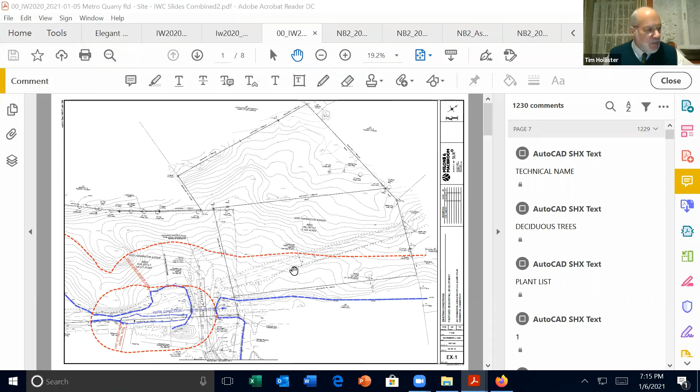What we'd like to do is start off with the existing conditions. As Shannon indicated, this land is essentially to the rear of Farmington Ave. This plan in front of you is what's in your plan set, except we've gone ahead and highlighted some important things for this commission. On this plan, you can see the blue line represents the wetlands.

Embedded in the wetlands on the left-hand side of the plan is a smaller blue line. That's the vernal pool that Megan Raymond has spoken to and will speak to later on. Also for indication, we've shown a 100-foot offset off of the vernal pool for your information. And then the red line is showing your upland review area.

So the subject part is really two parcels. It's accessed off of what we call Quarry Road. If you're coming along Farmington Ave, there's a traffic light that goes into the UConn, I guess, genome facility. You would pull in there and then take a quick left into Quarry Road.

Quarry Road, the first say 50 feet is gravel, and after that it's actually paved all the way up into this site, as you can see on this plan. That was installed as part of an application many years ago. They extended utilities and Quarry Road over the wetlands and over the gas easement line. Underneath Quarry Road, connecting the two wetland areas, are three 24-inch pipes.

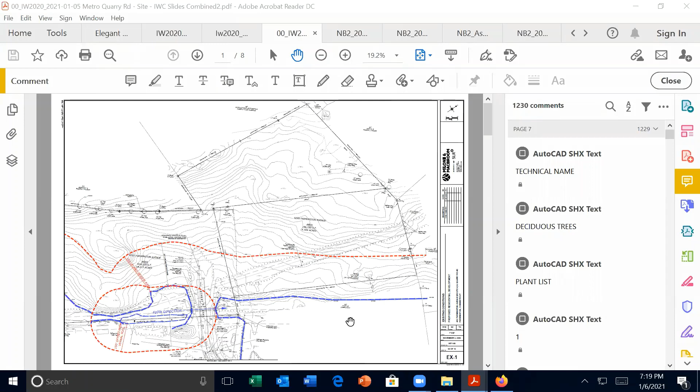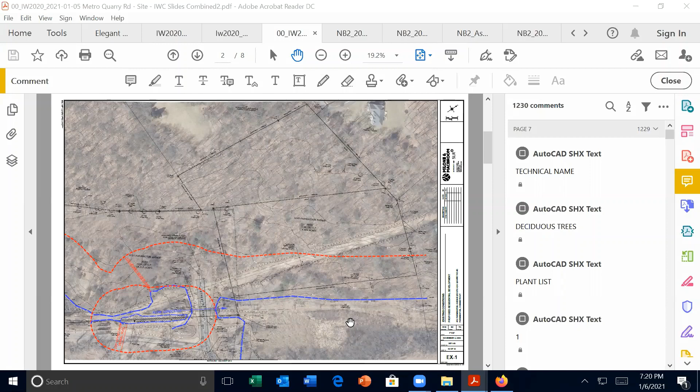Next slide, Shannon. This is the same exact plan we just showed you, but we brought in the aerial photo below it to give you some better perspective. I think the topo survey does a nice job on that. So Shannon, next slide.

So here is the proposal that we have before you this evening. As the record read, it's a single multifamily building with 146 units. We have 221 parking spaces, and of those, 32 are located in detached garages, and 52 are internal to the building, so they have garage doors and are actually under the building itself.

One thing I would note of this plan is garage F has been relocated. That was some comments the commission made at our previous application, that they had interest in moving garage F out of the upland review area. You can see from this plan we've shifted those to the north and met that standard, where we're now out of that area.

As the project goes, the vast majority of it is located out of the upland review area. We actually have only a very small impervious area located in the upland review area - that small parking area there totals about 6,500 square feet. We're also paving the end, where we pick up where Quarry Road ends and goes up the hill, about 4,600 square feet. So a pretty small area considering we're talking about 10 acres of site.

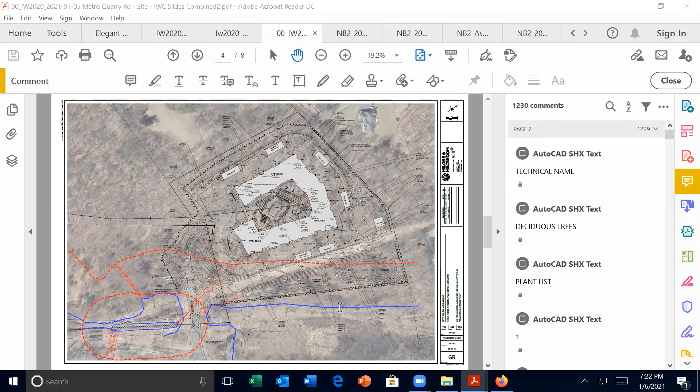An important part of this project is the stormwater system. We're dealing with stormwater in 2 ways. One, there is a very large watershed that flows from west to east towards the wetlands, coming through the property. It's an off-site watershed that we are managing, and because it's essentially coming from off-site sources and not through the project, we did not want to route that through our stormwater water quality chambers and basins. So we've created two drainage systems that pick up that water on the perimeter of our site and route it around our project. All that water coming off the site gets routed around, and ultimately does meet up with the outflow of our detention basin, but then discharges to the wetland.

And then on the north side, by the maintenance building, we have one run where we have a swale at the top of the slope, and that water will get picked up. Once again, it does not get routed through the detention basin - it gets taken right to the wetland. That's an attempt to continue to match watersheds.

For the water that we are picking up on the site, we are routing those to 2 stormwater basins. Both discharge - we had to very critically locate those pipes based upon crossing the gas easement. We do have stormwater chambers, or hydrodynamic separators, located on both of those pipes before they go into the detention basins. In addition, those detention basins are designed for both water quality and quantity. We've analyzed the basins for the 2 through 100-year storm events, showing no net increase in runoff for those storm events. The hydrodynamic separators have been designed for 80% removal, and the bottoms of the basins have provided for water quality retention.

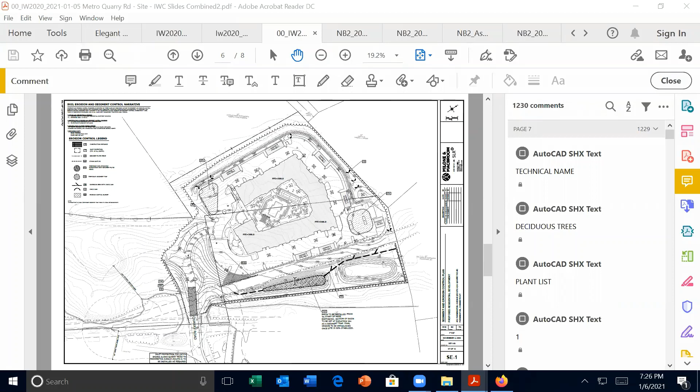As part of this, we have worked with CR3 Landscape Architects to develop a landscaping plan. Megan Raymond was also part of this in terms of selecting plants. I'd like to focus on the area of the gas easement and the detention basins.

We're proposing a native wetland and conservation seed mix in the basins. Along the new clearing limit, which is not at the wetland but at our property line—the wetlands are actually off our property—we've come up with a native planting scheme to buffer that new clearing limit, made up of both native shrubs and trees that will restore that edge. Megan was able to help select appropriate plantings for that.

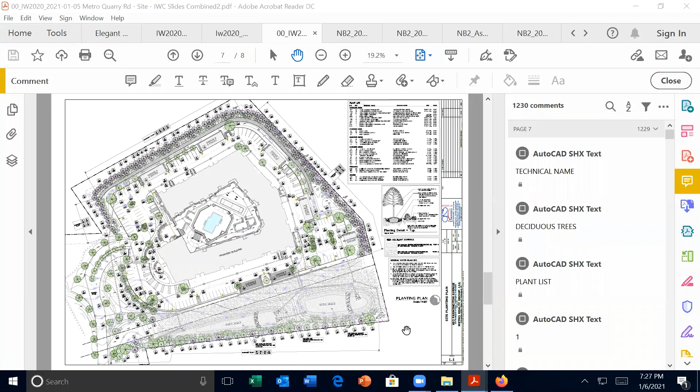As Tim indicated in the introduction of this application, the applicant is now committed to deeding about 4.6 acres of open space.

What you can't see is that on plan left is land already owned by the land trust, so this 4.6 acres will actually be directly abutting their property. That's currently a wooded parcel, and I have a Mylar right here which we'll be delivering to Metro Realty tomorrow for filing on the land records for that dedication of land.

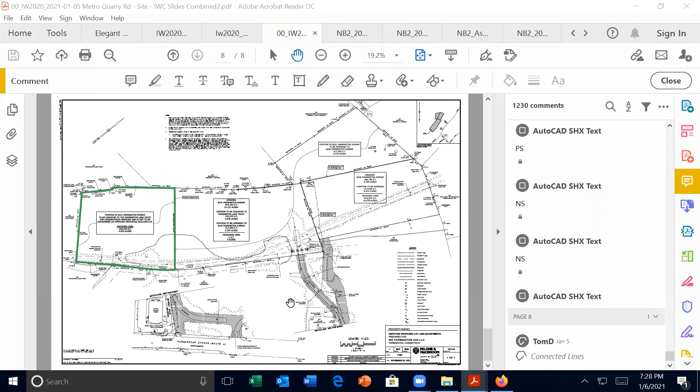Thanks very much, Tom. For the record, my name is Megan Raymond. I'm a professional wetland scientist and registered soil scientist with Milone and MacBroom.

I've been involved with the project since the wetland delineation, which occurred in the spring of 2020. The wetlands on this property were previously delineated in January 2017 by Eric Davison. What I completed this spring was to evaluate his delineated line, verify those boundaries, and augment a portion of the wetland that wasn't delineated north of Quarry Road.

What we're looking at is a wetland complex that runs along the topographic low of these parcels. This system originates in a shrub swamp that exists off-site to the south, and occupies a low gradient flow, when there is flow, in a northerly to northeasterly direction.

This wetland is a palustrine wetland comprised of 3 primary classes—well, the offsite portion is shrub, but on the property itself there are 2 primary wetland classes in existence.

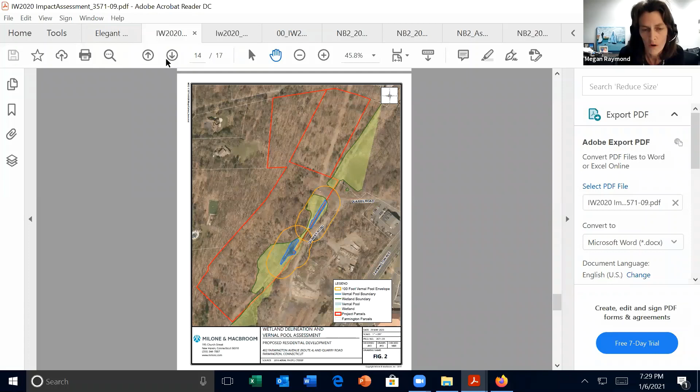One is an emergent wetland, primarily those areas bounded in blue—emergent wetland vegetation surrounding an open water, seasonally open water area. We also have a portion of a red maple swamp that exists just south, in the southern portion of the wetland, where it bows out along the south.

Because this wetland exists along a corridor, in addition to the gas easement there's also an electric and telephone corridor that runs through this area. So there's been quite a bit of disturbance within the wetland boundary itself, which has resulted in the creation of 2 large trough areas, large in relative terms to the overall wetland area.

The acreage of the wetland on these properties is about 1.98 acres, so about 11% of the collective land area between these 2 parcels. Obviously the 4.5 acre piece does not have any wetlands on it, and all the wetlands are confined to the larger 14-and-some-odd acre piece.

These troughs exist within the wetland boundary as excavated features that contain standing water seasonally. Going back to the original wetland delineations, these portions of the site were identified as potential vernal pools. So in the 2020 spring delineation assessment, we also completed a vernal pool assessment to evaluate the composition of these areas as it relates to seasonal breeding for wetland obligate amphibians.

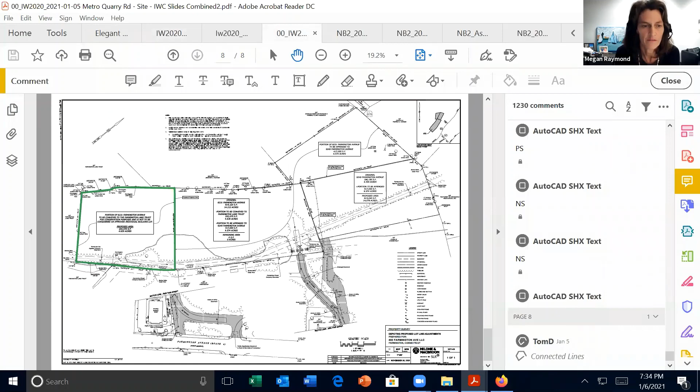When we're looking at this, I think this is a great overview, but I think we can flip to the proposed condition. Yeah, I think that would be a good one to start with here.

When we're laying out this site development, we did pay special attention to the types of wetlands and the wetland functionality present on the property in order to maintain these physical characteristics of the wetland systems.

In looking at the landscape position of the special wetland features, which would be considered vernal pool or wood frog breeding areas, in concert with the overall site layout, we feel confident that the site as proposed will not impair or impede any further productivity of this site as it relates to wetland obligate amphibian breeding.

The work that's proposed is located a good distance to the north of the wetland features, and primarily what we're looking at is protecting the adjacent wetlands through management of long-term considerations through stormwater management and short-term considerations with sedimentation and erosion control.

The sediment erosion control basins are going to be located east of the gas easement, and though this area will be initially disturbed, with the creation of the basins it will be revegetated, and the natural buffer will be reestablished between those two areas.

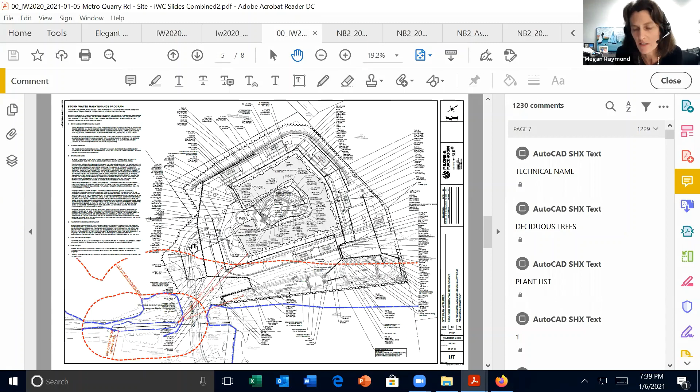I'm happy to answer any questions that you may have at this time, but I'd like to turn it back to Attorney Hollister, unless Tom, would you like to add anything?

The only comment I would say is we, at the previous application, had a list of comments from the town engineering staff. You had it in your packet. I will say that the comments tend to be both planning and zoning and wetland related, but I am confident to tell this commission that we received an updated list from Bruce Sear. As I read through the comments, I do not see any comments that are wetland related, or drainage related.

Just one little question about dimensioning the size of a straw wattle and showing where our dewatering is. But otherwise, I can report to the commission that in fact we've addressed any drainage or erosion control or wetland related comments. And I think if you look through Bruce's most current plan, they're all planning and zoning related, but we did work hard before the holidays to get to Bruce, and I appreciate that Bruce found a time over the holidays to review those, but that would be the only thing I would add.

Megan, thank you. Mr. Chairman and Commissioners, there is also a memo from Ms. Rutherford dated December 31st, which goes through the upland review activities, and it pointedly says there is no direct wetland impact. So that is, Mr. Chairman, that is our presentation. If you want to move on to commission questions, we're happy to do that.

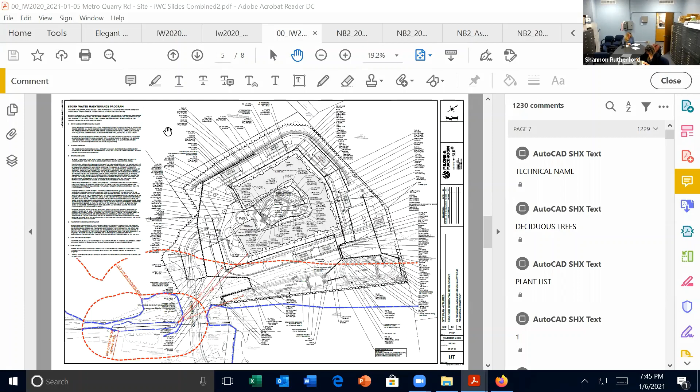Thank you. Okay, Dave? Just one quick question. It was good to see that they added some treatment for those catch basins out on Quarry Road. It's a sediment chamber as opposed to a hydrodynamic separator. I was just curious as to the differences there, but I do realize there's only 3 catch basins involved in it, as opposed to the many from the parking lots. Hopefully a regular sediment chamber would be sufficient for that, but I'd just like to hear a little bit more about that.

Tom Daly for the record, again, exactly what you were saying. It's only taking 3 catch basins, so we thought at that point it was appropriate to come with a sediment chamber. It's a baffled structure, catch basin located over the first part. It's actually a structure used regularly in the town of Glastonbury - they call it the Glastonbury sediment chamber. I think it works well here, and it'll also allow pretty easy access. But it really had to do with exactly what you're talking about - it's only picking up 3 catch basins and a very small portion of roadway. So that's why we chose to go with that at that location.

Thank you. Is that it, Dave? Yep. Okay, Emily? I have nothing at this time. Thank you. Okay, Rich? I have no questions at this time.

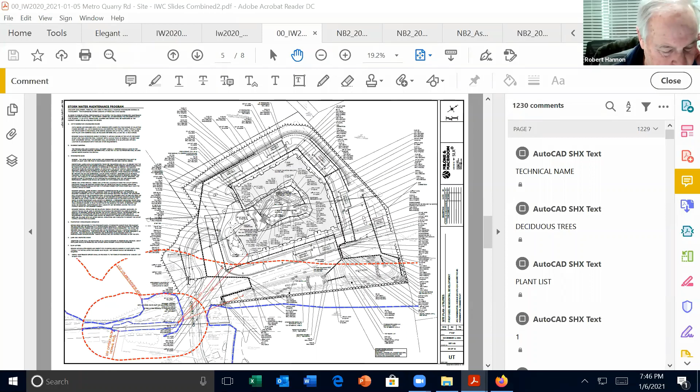I've got a couple, just for clarification purposes. I think you said there's 3 existing 24-inch concrete pipes. That's correct. Located - I'm trying to get the right angle - is it a little bit to the west of where the vernal pool is? Let's see, Shannon's going to try to zoom us in, but just slightly west. Correct. Now is that part of the roadway gravel, or is it paved? That's paved. Paved, and all the utilities are already stubbed on the other side. So except for putting a finished course of pavement and curbing down, it's our belief that road's ready to go.

Okay, so you don't need to do any work on the pipes, like redoing the road or anything like that? No. So that's all set and ready to go? Correct. And even the 3 catch basins we talked about, we are not tying into those pipes - we're going away. So those pipes will not be modified at all as part of this application. Okay, and I just wanted to double check, because again, if you start playing around with the pipes, because that's where part of the gravel road is, I just wanted to make sure nothing was going on there.

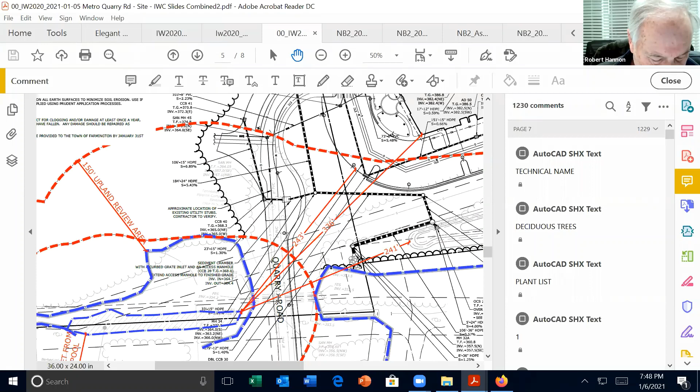In terms of the basins that are being proposed, it looks like you've got some forebays that are there. Correct. Will there be standing water in there?

Only the intent is for the basins to drain over time. What's your definition of time? It depends on the storm, and it depends on the time of year. We have put in the bottom of the basins...

What you can see is these little gravel strips located just beyond the forebay. We put those in to promote infiltration so it drains quicker into the soil. I would hope you're draining something between 24 and 72 hours after a storm, but it depends on the storm and the saturation time of year.

The reason I'm raising the question is because I can see that as a possible safety issue if you've got kids living in this area. So is anything being done to make the basins child-proof, if you will?

Interesting question. We have not come up with that on many projects before. The good thing is it's on the other side of the gas easement. And there's a retaining wall along the entire parking lot there and behind garages E and F, almost right to the end. That retaining wall will actually have a fence and a guide rail in front of it.

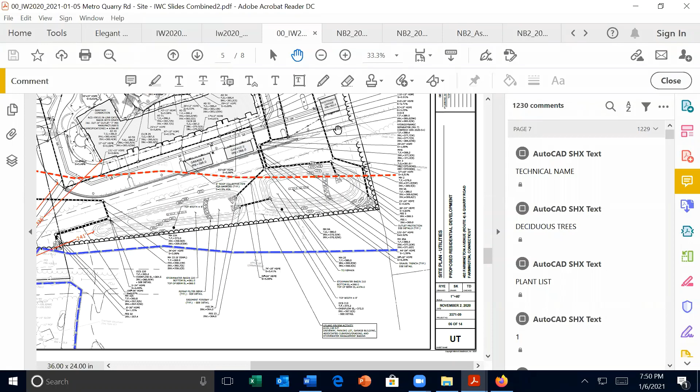Potentially we could extend that ornamental fence just a little bit farther so it runs into it—essentially then you'd have to jump a fence to get over there, cross the gas easement and into there. So that's something we could consider. I think that would be advisable, just from a safety perspective.

So we would just extend that ornamental fence from the end of the retaining wall to the tree line to kind of tuck it up. Yeah, I don't see an issue with that.

Okay, and then just out of curiosity, I know you've got the 100-foot envelope around the vernal pool. Have you done any calculations as to what the disturbed area is around a 750-foot envelope around the vernal pool?

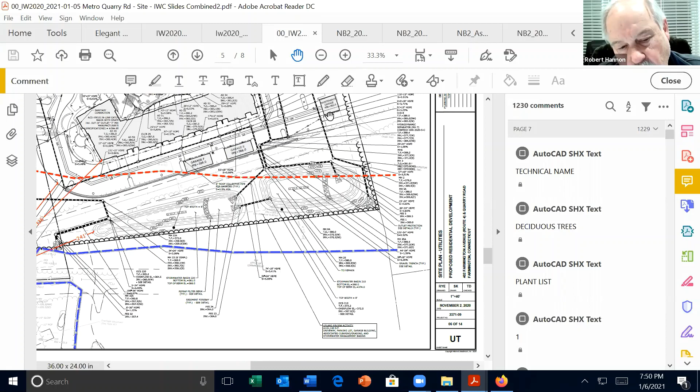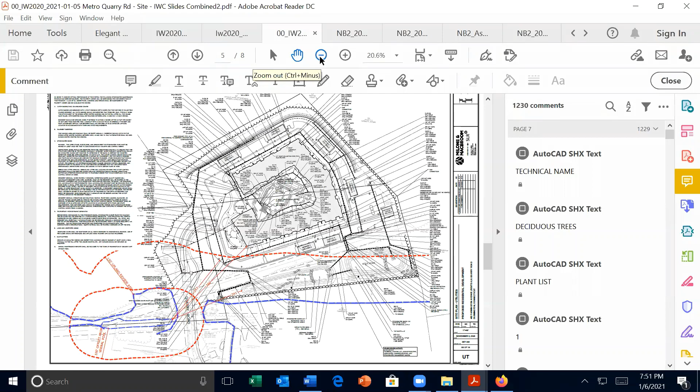Yes, we have looked at that, the overall picture. If you look at these systems and put the 750-foot critical terrestrial zone around them, and subtract out the existing area of disturbance, which is significant along Farmington Avenue, we're looking at an existing critical terrestrial habitat disturbance of approximately a little over 20 acres within a 60-acre zone, and we're adding a little less than 7 acres to that. So the existing disturbance is 37%, and we're adding another 11%. The overall critical terrestrial habitat that remains is greater than 50% with the proposed project.

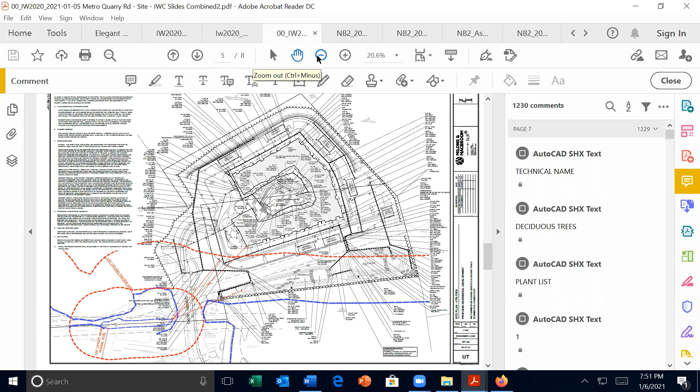Okay. I'm sorry, it's been a long time since I've been on Quarry Road—is this where the old landfill is? It would be left on this plan, off this plan.

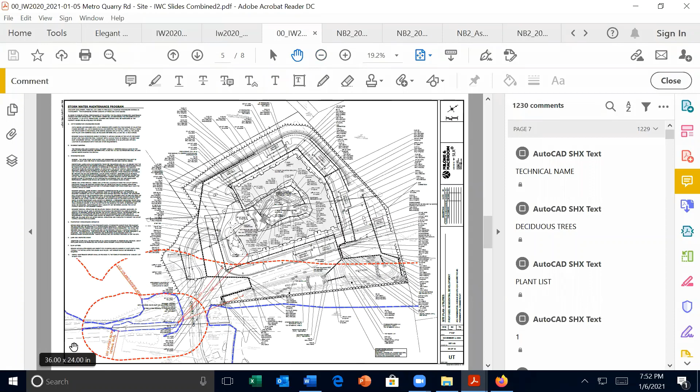So yeah, there we go, Shannon, over there and a little bit farther down off the map. Correct. Were you on the site walk with us that day? No, I was not—I had knee replacement surgery. Oh, I'm sorry to hear that.

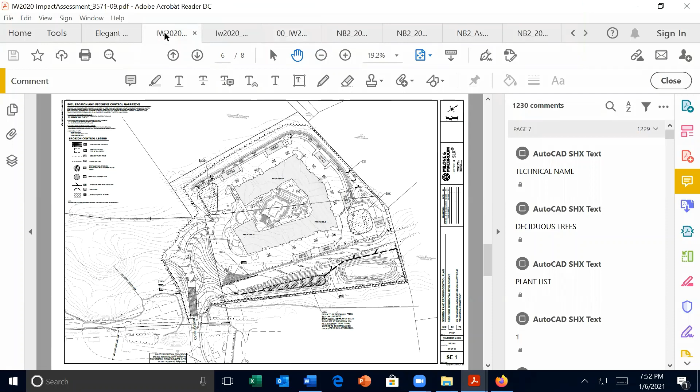So yeah, that exists, and there's a public works facility there with a lot of material storage present now. So that whole zone extends to the southeast. Right, exactly, there you go. That's great.

No, I just wanted to double check because I wasn't sure which side of the line the landfill was on, that's why I'm asking. Right, so what we're looking at is, because we have this topographic low in a confined area with a nice scrub shrub wetland existing offsite to the southeast, we're looking at this southern directional buffer in this location. Okay, thank you.

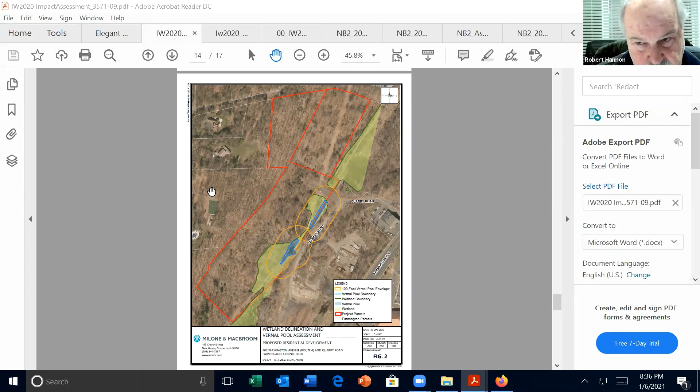And we have other public comment. So at this point in time, do we want to open it up to the public? And you've got control of that because I'm not sure who from the public is here.

I think I want to try to do something here. This is always a unique experience when you're dealing with the computer instead of in person. No, it is, and everybody's been very patient.

Mr. Fitchman's hand is up. I was going to— I think Mr. Hollister's hand is up too.

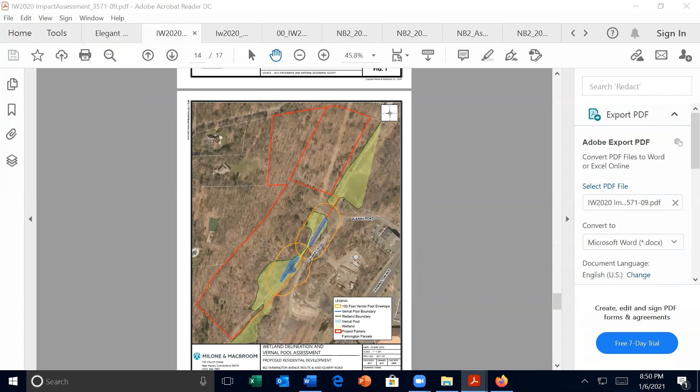Does anyone else from the public have any questions, comments, or anything they want to share with the applicant or the commission, either in favor or in opposition? Any questions regarding this matter? Mr. Chairman, I'm not seeing any additional hands raised. So again, if you have a question, use the Zoom function to raise your hand electronically, and you will be addressed just as your peers have this evening. Mr. Chairman, I'm not seeing anything else, any further questions.

Okay, if that's the case, I think where we're at with this is continuing it to February 3rd, correct? 7 o'clock. Correct. We're looking at having the materials come in from Mr. Logan on or before the 22nd of January, and looking for Dr. Clemens' comments on or before January 22nd. There were a couple of comments raised by the public that the applicant may also want to research and provide some answers to at that point in time.

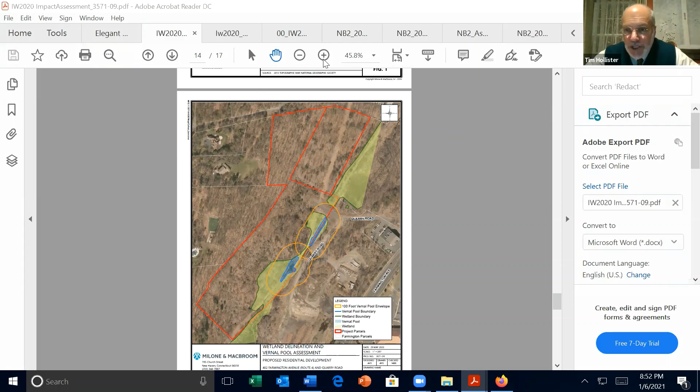Attorney Hollister: Mr. Chairman and members, I just want to put on the record that we will provide the additional information that was requested by Dr. Clements and Mr. Logan. We'll provide that to them hopefully within a couple of days, so they have ample time to look at it and work it into their reports. We will try to file our own responses to other public questions also on the 22nd of January. And for anyone else who is retaining an expert, you can contact my office or Mr. Richards, and if you want information, we will get it to you as quickly as we can. Shannon will keep you in the loop so you know what questions we have, or what requests for information we have received and responded to. Thank you. Certainly, thank you.

Do we need a motion to continue it to the 3rd? Yes, please. Would somebody care to make a motion to continue the public hearing until the 3rd of February, starting at 7 o'clock? Move to continue. Robert Hannon with the motion, and we need a second. Dave will second. Okay, those in favor? Aye. Opposed? Abstaining? So be it, we continue it to the 3rd. And Mr. Chairman, Jay Tulin posted aye in the chat. Thank you, Jay. Thank you, Robert.

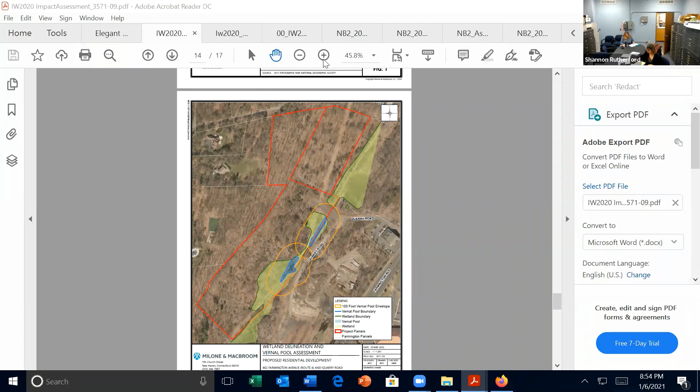Going to new business. My understanding is Jake Clark will not be here tonight, so we need to table this until the next meeting. Correct.

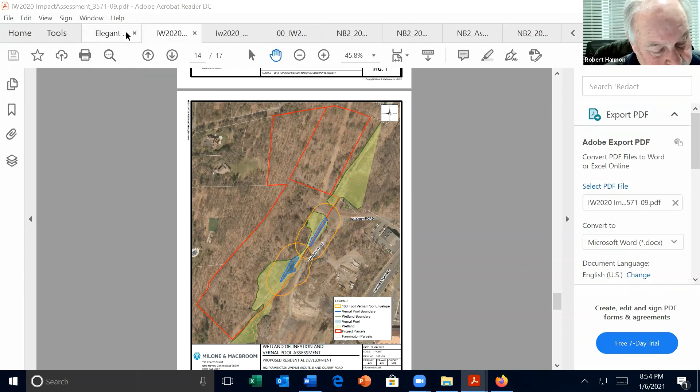Okay, so continuing in a long line of recent events, the show cause hearing at 16 Clearbrook. Yep, just give me one second and I'll get the documents here. And I think the property owner and Ian Cole are on. So, yeah. Ian, are you taking the lead with this?

Sure. Good evening. For the record, Ian Cole, professional soil scientist, professional wetland scientist. I'm here tonight with Mr. Riviera. I was retained by Mr. Riviera to assist in resolving the recent cease and desist order. This order involved the removal of vegetation within the 100-foot upland review area.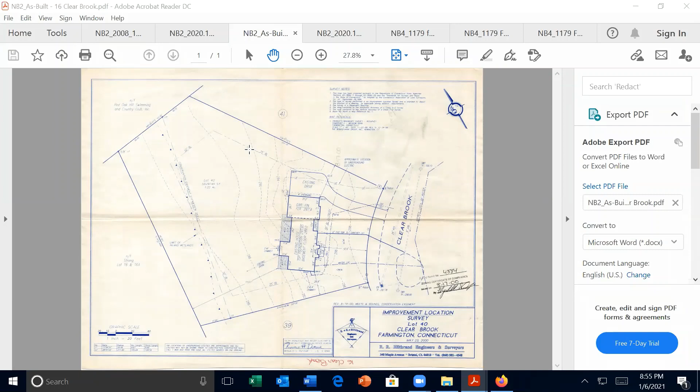Last week, I had an opportunity to visit the site and do a quick assessment with Mr. Riviera present to go over the limits of the recent vegetation removal. I wanted to get out there pretty quickly to take advantage of the ground while it was free of snow, just in case we got a big snowstorm, so I could see what went on there. My initial thoughts are that the area was stabilized and no immediate actions were needed. The backyard is flat, and the ground still has cover to it, so there's no instance of exposed or bare soil creating a risk to the wetlands. And while on site, I think it's also noteworthy, Mr.

Riviera had the easement surveyed and very well marked out and delineated prior to this work. So it's very easy to see and demonstrate that there was no encroachment into the conservation easement or the wetland boundary, and I think that is notable.

The intent here is to work with the applicant to put together a more comprehensive wetland application. The intent was to gain more lawn and start a feasibility study for some backyard improvements to maybe include a playscape and a pool. So with that being the intent, and given the time of year, we were looking to come back to the commission with a complete application, and during that process, some restoration activities would be accounted for in that wetland application for the overall property improvements.

I guess I would defer. I'd be happy to answer any questions from the commission at this time, but otherwise, for additional background, Mr. Riviera can provide that if the commission has any questions. I didn't know, because I can see that he's on the phone, so I don't know if Mr. Rivera wanted to speak before we handed it over back to the commission for questions.

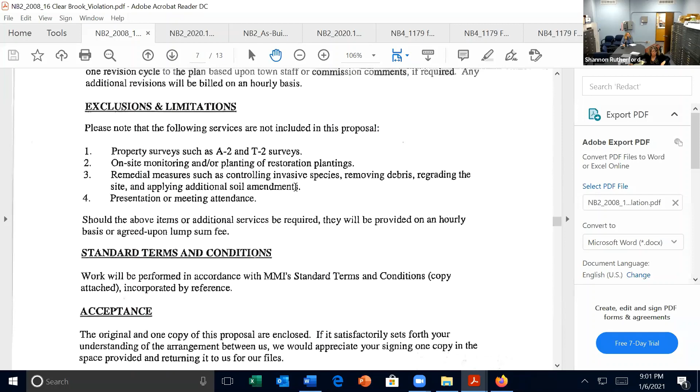Some of those plantings were in the wetland conservation easement. I think Bruce has the plan here. The restoration plan - you can see the conservation easement line running through. Bruce indicated that perhaps some of these smaller plantings that were part of the area that had been cleared, but were outside of the conservation easement, had been removed.

So some, and I say some, like it looks like anywhere from 3 to 5 at the very most small shrub bushes that had been planted as part of the restoration activities in 2008 may have been removed. But as Ian said, and Bruce verified with some of the photos he's taken, you could see the line that was marked, and none of the clearing took place within the conservation easement.

But the wetland line is just here off the edge of the page, and the 150-foot upland review comes well into the yard. So I know we run into incidental and customary use of the backyard, and that's normally where we would have the pool.

An in-ground pool would normally be reviewed as part of a review process with the commission, and sometimes depending upon the proximity to the wetlands, we make the determination that it's customary to the backyard, and sometimes it requires a full permit depending on proximity. So I figured we better have this all come in before all of you.

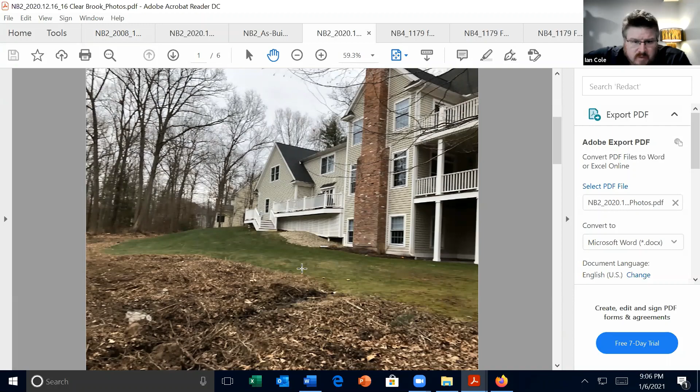Yeah, I just wanted to check with Ian. You said you went to the property and the area that was cleared was stable, at least for the winter? Yes, it's very flat in the backyard where this activity occurred, and the ground structure there is very bony. There's a lot of surface stones. There's still a fair amount of leaf litter and some of the residual wood chips on the ground. So you can see from these photos here, what's left is the remnants from the vegetation that was removed. Okay, that's all I have. Thank you.

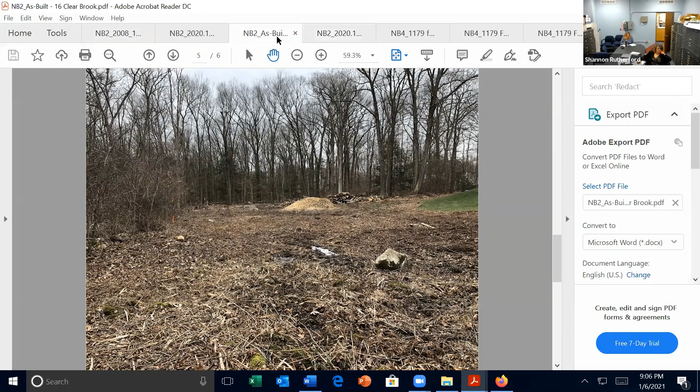Okay, I did not see anything in chat from Mark, but I did see something from Jay earlier saying he had no questions. Correct, I'm seeing the same. So Guy? I have no questions. I don't really have any either.

I mean, again, I think I agree with Robert as far as the pool goes. To me, that's sort of an incidental residential use activity, so I don't really have too much heartburn with that.

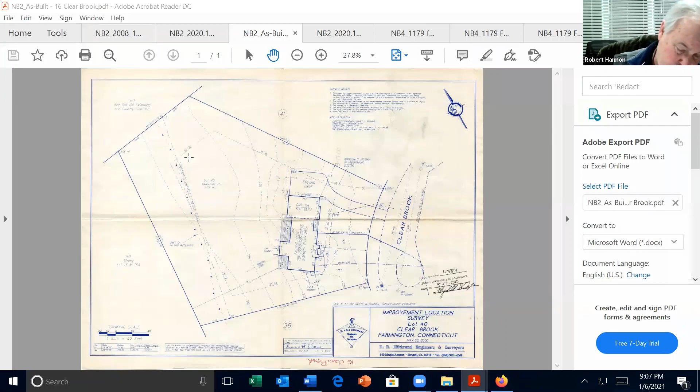Just looking to make sure that what needs to be done as far as reestablishing that landscaping gets done. But is that something, Shannon, that you guys in the office will oversee? Because did we get a plan for that? What I'm not sure of is, trying to look, because I think the plan we were looking at was done by Milone and MacBroom, but that was back in 2007, 2008.

No, there isn't, because Mr. Rivera is going to work with the pool company. I think what we're going to get is perhaps one comprehensive plan that shows all the work he has envisioned, rather than do mitigation work and then muck it up to get a pool in. So it'll be nice to get something that shows what he's envisioning for his backyard, and it will include the restoration items that Ian proposes. So we'll get a chance to look at something in totality, and then we can approve the restoration plantings, and then at that point make a determination on how we want to react to the pool and be able to move ahead.

To me, that sounds like a good approach. It's better to do everything at one time so that activities are coordinated. Doesn't make any sense to put landscaping in, then have somebody come in with equipment to put in a pool. You take down some of the landscaping that just got put in. So let's do it in a logical sequence. That's my take on it.

Okay, perfect. I think that sounds good, and we'll continue to work with the homeowner and Mr. Cole and get a plan back before spring, before they want to get everything moving, so that they've got plenty of time to get a shovel in the ground. Any idea when we might be looking at getting some plans in?

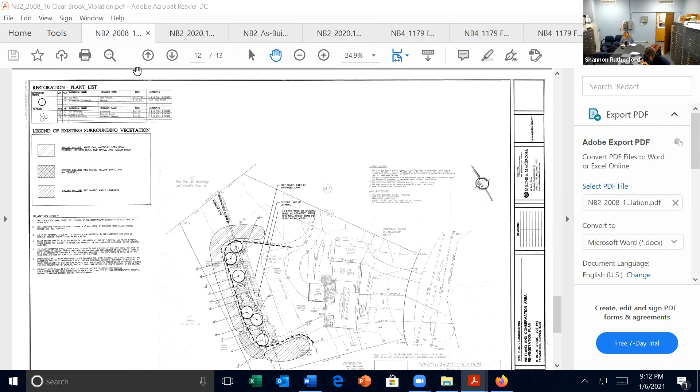And that's all I have. Okay, for that matter, there's no action we have to take on this right now, is there? Correct, no action with that one. Nope, it was just an update for you. Okay, all right, thank you.

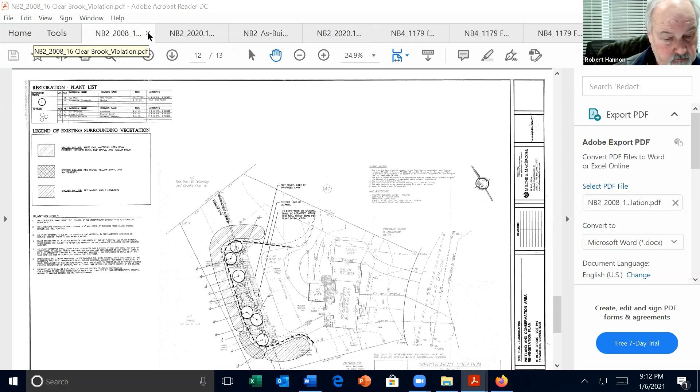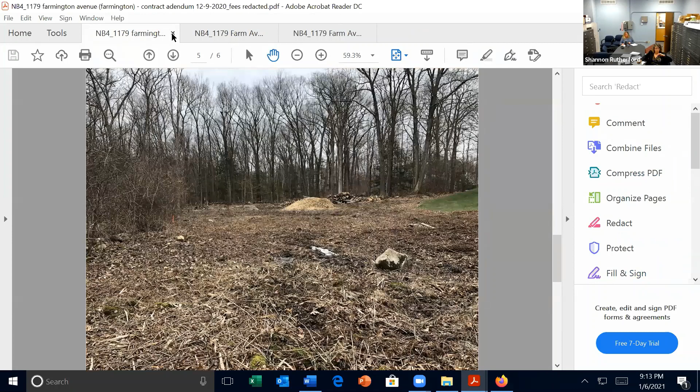1179 Farmington Avenue. Yes, so there's two items. If we could, I'd like to take care of the contract for our sub-consultant first. So all of you received the amendment. Obviously this is continued, so there's additional items and additional review coming up that is necessary in order for Ed Pollock to continue to review plans and the revised mitigation and restoration plan, and continue to work with both myself and George Logan.

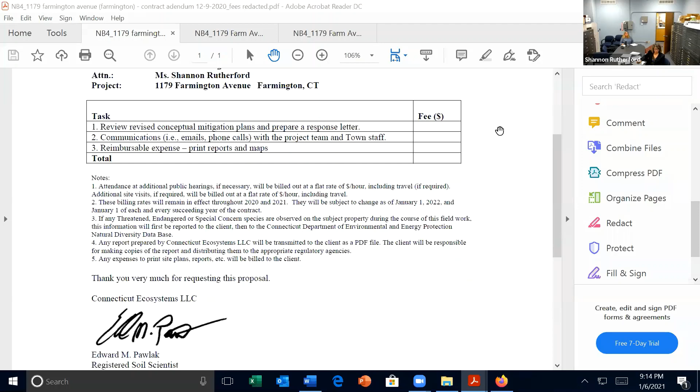You all received the full proposal with the fees. For these purposes, I redacted the fees, and the full contract amendment was sent to the applicant and his attorney, so they have seen it as well. So unless there's a question or a concern, I wanted to put this forth, and if all are in agreement, then I will go ahead and get this executed on behalf of the commission so that we can continue services with Ed.

Do we need a motion on this one? I don't know that we need a motion, but a general consensus would be helpful, if somebody's got a comment, question, or concern. Yeah, I'll just run through the list, starting with Guy. I don't know.

Jay, did you send something up in chat? I'm looking, nothing, no comments or concerns. Okay. Ned? No, it looks fine to me.

Okay, Mark? Can you hear me? Yes. Oh, I don't know why it all didn't work. No, go, I'm fine. Okay. Robert?

Yeah, I'm supportive. I think the information we're getting from Ed Pawlak is clear, concise, informative, so I support the extension of work services. Thank you.

Dave? Dave, he's muted. Sorry again, I was agreeing with Robert. It's money well spent. Okay, thank you. But we didn't see you shaking your head.

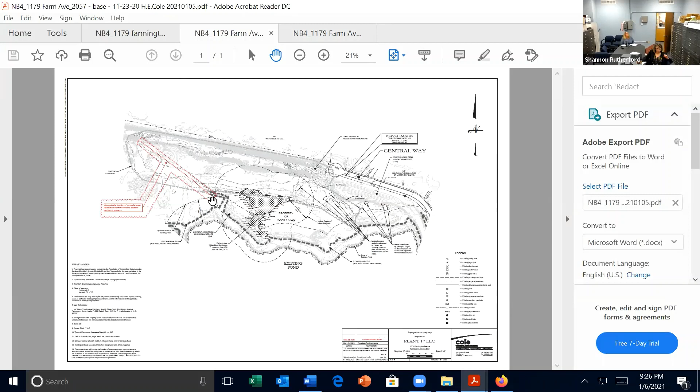But wetland B wasn't formally flagged. When I flip back here, I can see the edge of the pond, and I can come straight north and there's wetland B. So I'm looking here and I come straight north, and that's why I'm like, this can't come straight down—it's got to kick a little bit to the left.

So that's why that's there. This particular plan was one of George's exhibits, and I'm fairly certain this was the haul road. So this red line represents what they believe the haul road from 2016 was, from the historic use of this site as an excavator. So that haul road has been there.

Yeah, that's what we're walking on during the site visit a lot. Basically, yeah, you're right, that's the road that we walk. So that's all that is, for visual reference.

And have they continued the cleaning of the invasives? I think they did for the mugwort, at least in this area.

Okay. And obviously now for the winter, we've had snow—certainly the foot of snow that we had mid-December would have knocked most of this down because it was a heavier, wet snow. Right. Yeah, I'm okay with town staff delineating the location of the Jersey barrier and then making record of it.

Okay, and we've got Jay in the chat, and Jay for this particular matter says I'm fine. Jay, just so I'm not ignoring your questions on the intervenor status, if it's okay, we'll come back to that at the end. I can't type information to you, listen to what's going on, and drive the webinar and all the slides at the same time. So I'm sorry, but I'm not ignoring you—I figured we'd have a general chat at the end, and I'm more than happy to make sure everybody's questions regarding the intervenor status are addressed prior to us signing off.

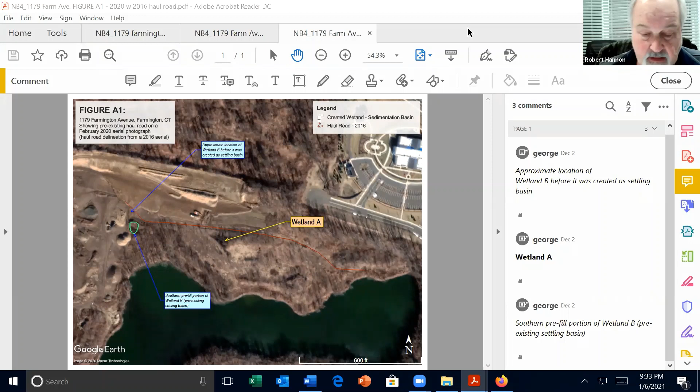Starting with other business, Land Acquisition Committee report. They meet next week. They met in December, and I did forward their comments. I don't think we did anything; I think everything was executive session, if I recall. The next meeting is coming up next week. I don't have anything else coming to mind from a conservation standpoint.

I'm pulling up Liz's meeting minutes for December. There's correspondence from Richard Kramer dated December 2nd announcing his resignation from the Land Acquisition Committee. Steve Nelson, a Farmington Land Board member, has been appointed to replace him. So Richard Kramer is retiring from Land Acquisition and Steve Nelson is coming on. As far as land discussions, there were none during open session. There was an executive session that lasted approximately 40 minutes. So that's all the report from Land Acquisition.

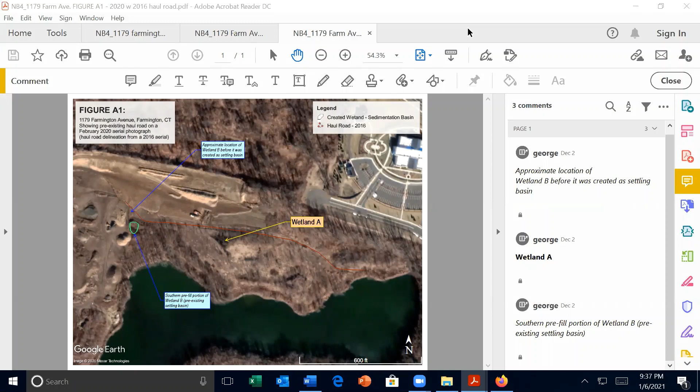Last thing on the agenda: can I get a motion to approve the minutes of the December 2nd, 2020 Conservation Commission meeting? So moved. Is there a second? Second, Ned. Second, Robert. Any comments, questions, corrections? Hearing none. Those in favor say aye. Aye. Opposed? Abstaining? Carries. Looks like about 9:37 to call it a night.